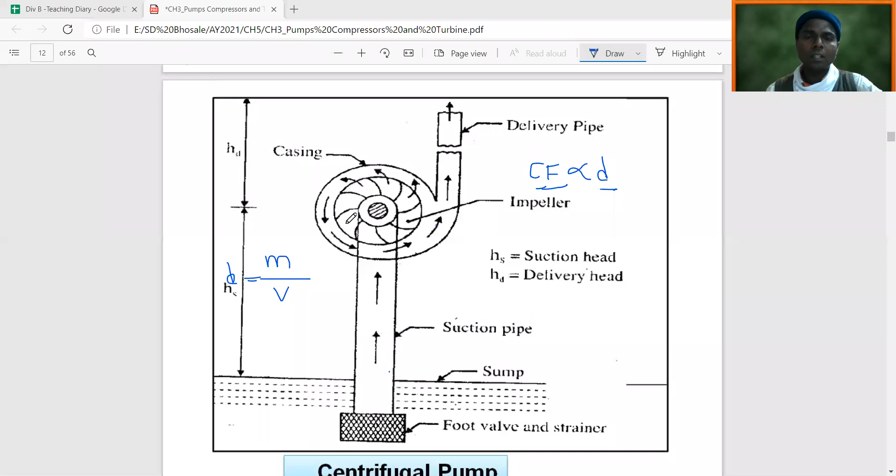If water is not filled up in the above mentioned parts of centrifugal pump, then there will be air present at the impeller. If water is not filled up in the above mentioned parts of the centrifugal pump, then there will be air present at the impeller. Written? Hello. Yes, sir. Stop. Next line.

Centrifugal force which is generated at the center of the impeller is proportional to density of working substance which is available at impeller. Centrifugal force which is generated at center of the impeller is proportional to density of working substance which is available at impeller.

Centrifugal force is proportional to the density of working substance which is available at the center of the impeller. Right? Hello. Yes, sir.

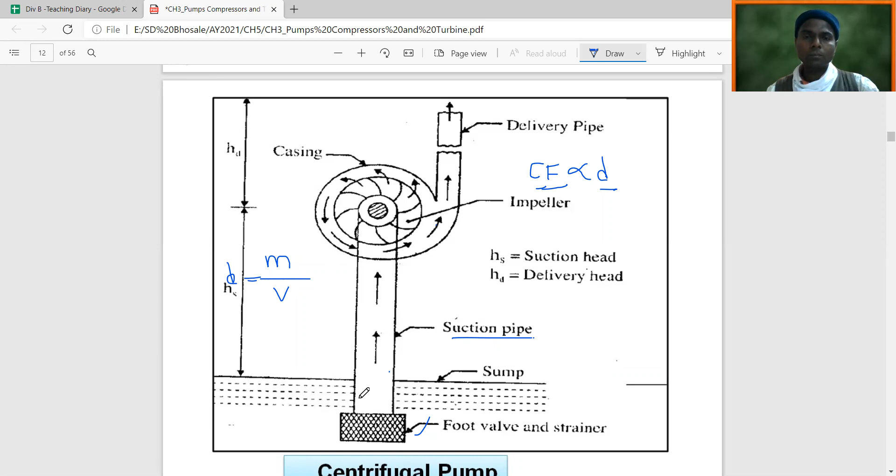Therefore, priming is required or essential for centrifugal pump. Therefore, priming is essential for centrifugal pump.

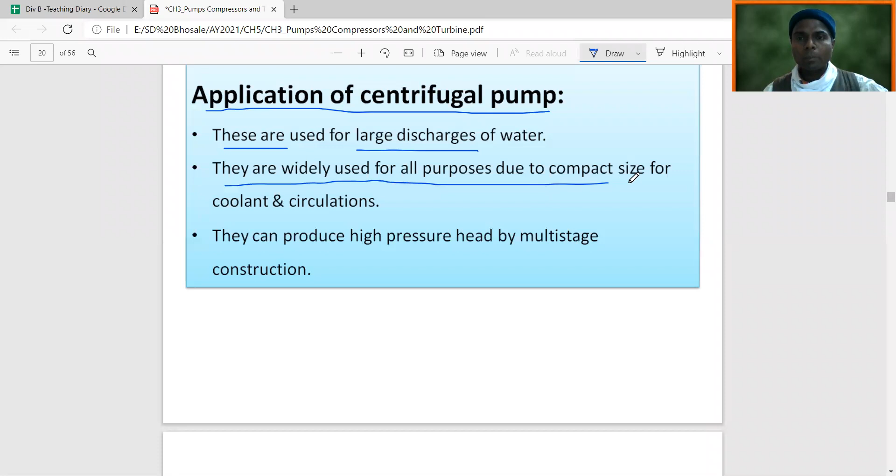They are widely used for all purposes due to compact size for coolant and circulation. Let us focus on the compact size. If you observe centrifugal pump and reciprocating pump, in case of reciprocating pump, large amount of space

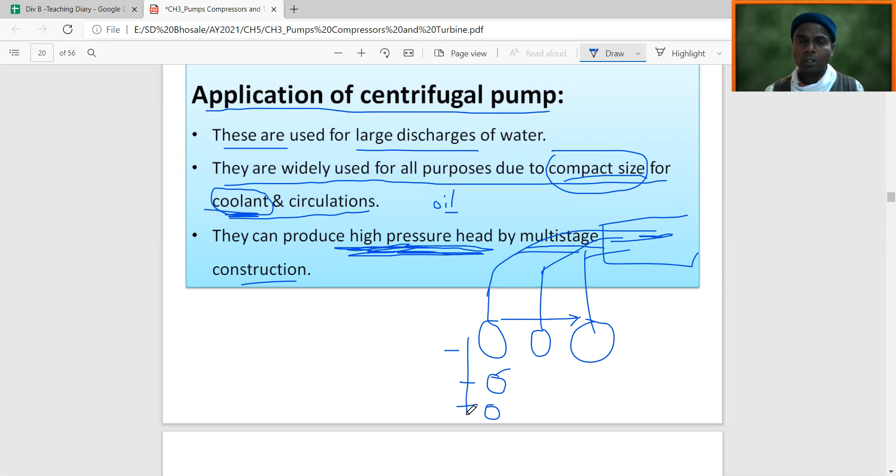If we really want to increase the pressure head, do we need to put all the centrifugal pumps in the parallel or in the series kind of structure, and this is called as designing of centrifugal pump for multi-stage. Hello, are you getting it? Sir.

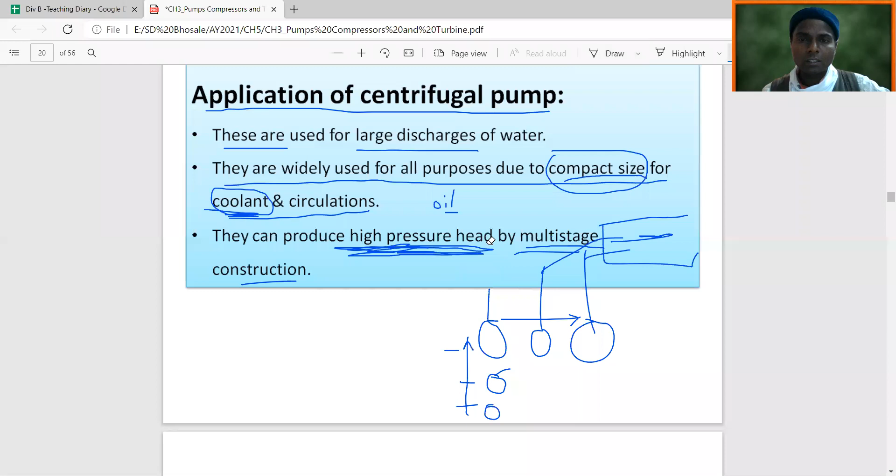To produce high pressure head, centrifugal pump can be used in multi-stage kind of design. To produce high pressure head, centrifugal pump can be used in multi-stage kind of design or construction.

Okay, hello, we have the last 2 minutes for this session. Okay, sir. Yes. We have the last 2 minutes for this session, so let us revise what kind of things we have covered. Okay, so we started chapter number 5. Name of the chapter is pumps, compressors and turbines. Out of these 3 mechanical elements or devices, these 2 devices we will be calling power consuming devices, and the turbine is a power producing device, out of which we covered pumps.

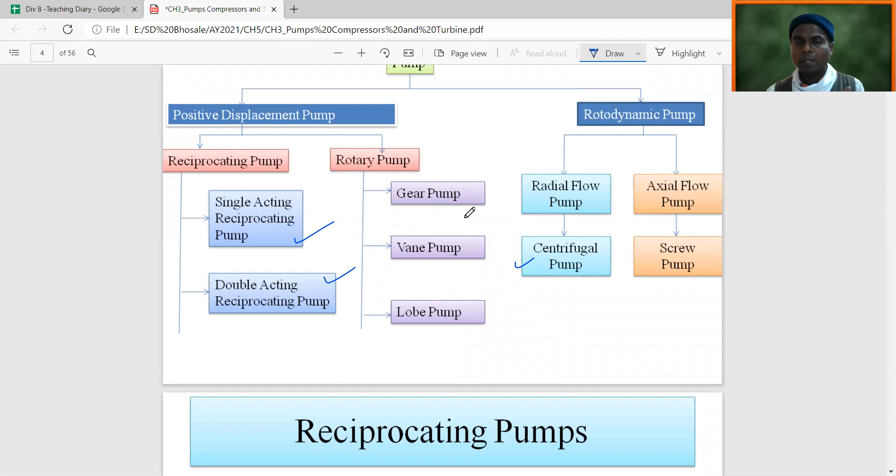And we started with pump: definition of pump, applications of pumps, classification of pumps we have seen. Out of which single acting, double acting and centrifugal pump, these 3 types of pumps are in our syllabus. And for all these 3 pumps, their construction, working and applications we have seen. Centrifugal pump is a rotodynamic type of pump, whereas single acting and double acting reciprocating pumps are positive displacement type of pump, and the rest of the pumps are not in our syllabus. Only these pumps we will be considering for the classification of pumps.

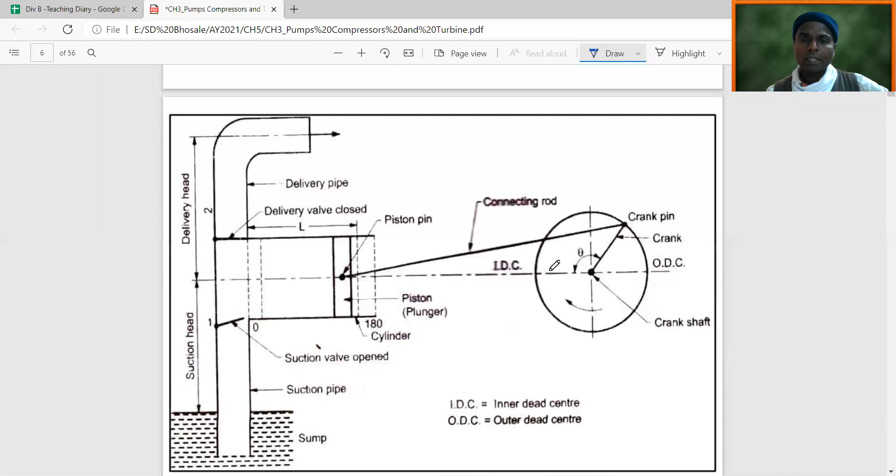Hello. Yes, sir. Now in the next lecture at 11 AM we will understand compressors. We will start compressors. Okay?